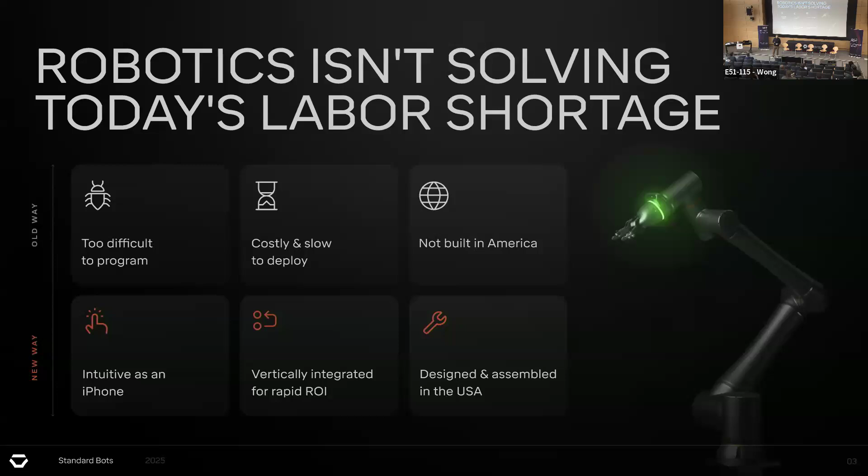So the problem we're solving is robotics today, most robots are just replaying motions. They're just running through the same movement again and again. And you almost have to be a software engineer to program the robots. So the interfaces are very confusing. You have to memorize a lot of things, and they're not capable of automating many of the tasks out there. Even for the most common tasks to automate with robots, the deployment rates are closer to 10%.

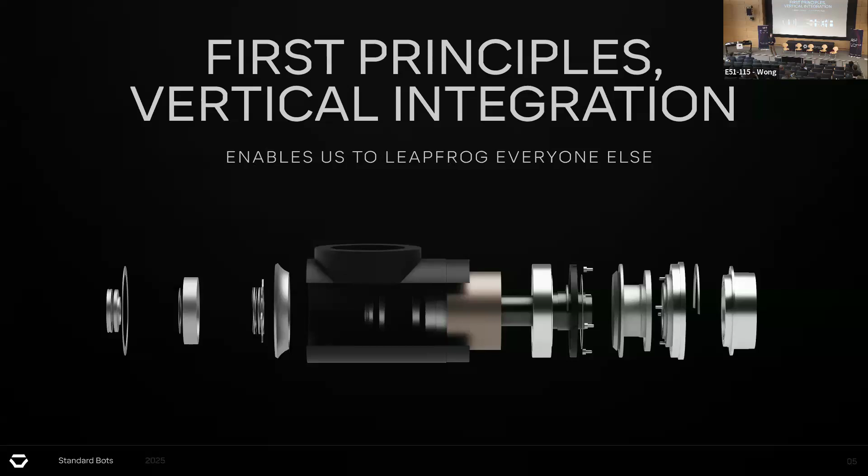But the real question and the focus of our company is on being able to automate a lot more. And the question we ask ourselves a lot is, why can robots do so little today? And the answer to that is really because there's so much variability in the tasks that customers want to do. And that can be the color and the shape and the type of objects, or it could be the environment and the lighting changing, or it could be they make one thing one week and something else the next week, and the program has to slightly change.

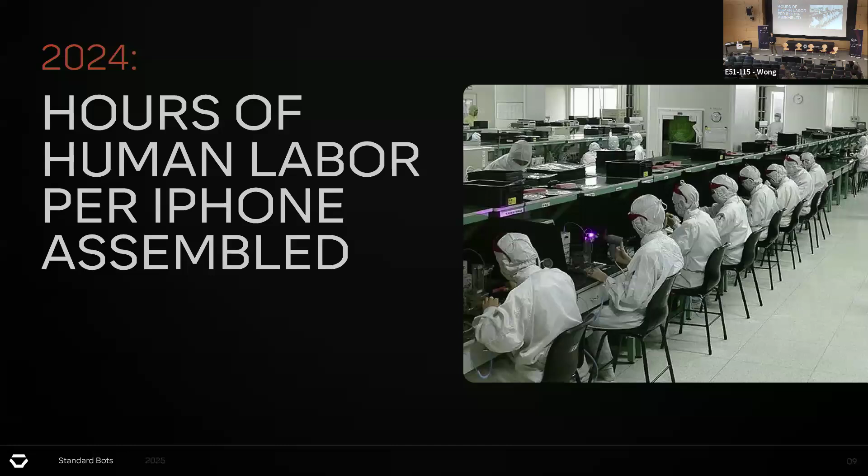And so the big change that's happening right now in robotics is this move to end-to-end AI models. And we've seen it in self-driving. So all the major self-driving companies are moving from just using AI for perception to find, say, the lane markers and the stop signs and those kind of things, and having rules-based or procedurally written code for actually driving, to a world in which the model is actually outputting trajectories, one or more trajectories, and they're choosing one of those trajectories and executing it on the vehicle. The problem with the procedural way is you write rules for one intersection, and then they kind of conflict at the next, and it becomes very hard to write a self-driving program that way.

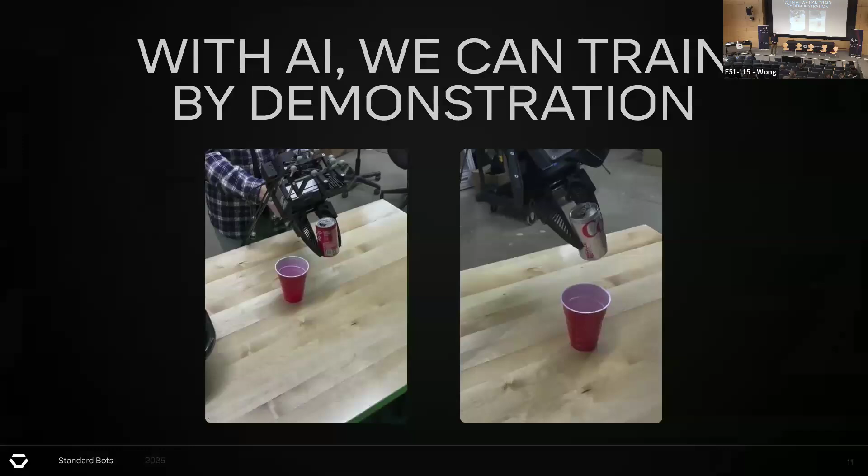Robotics over the last 10 years has been a lot of the same. There have been some models for detecting objects, but just detecting an object isn't enough to get a job done in many cases. And so we're seeing the shift to end-to-end models where the model is taking as input the camera data, the tool position, the gripper state, and it's actually outputting a trajectory for the tooltip for how to get that job done. These are some examples of this. I'll talk about a few ways that we collect training data, but this is a handheld device that we've made to collect training data, and on the right, it's operating autonomously.

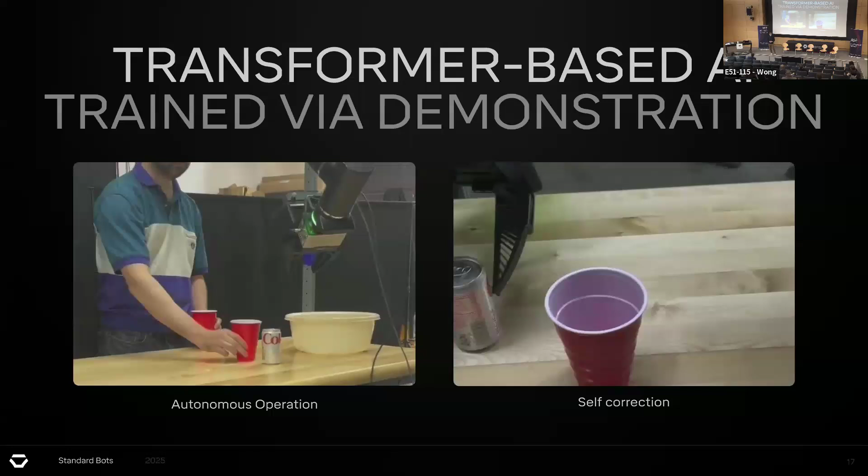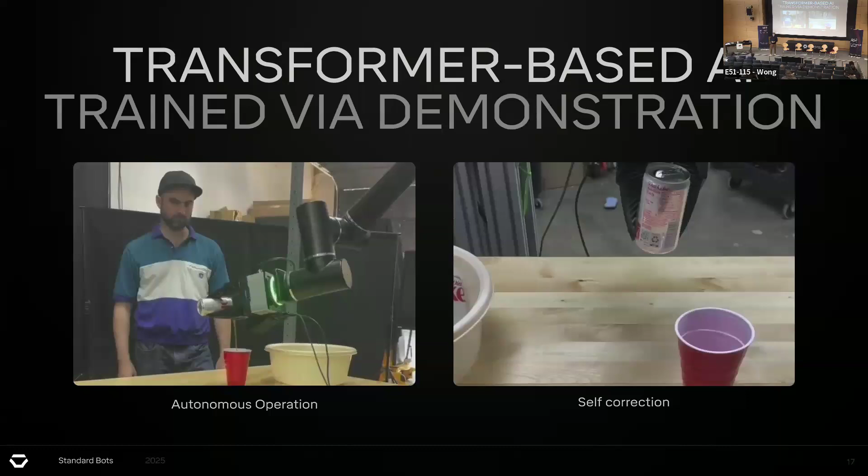The really cool thing about this approach is because it's looking and creating the trajectory in real time, it can react. So on the right, the user actually moves the can, and the robot can immediately react to that movement. It almost feels like it can think sometimes as we're training some of these models, where when something goes wrong, something slips out of the gripper, it can respond instantly. On the left, you can see it's robust to the location of the can, the type of the can, the location of the cup it's pouring into.

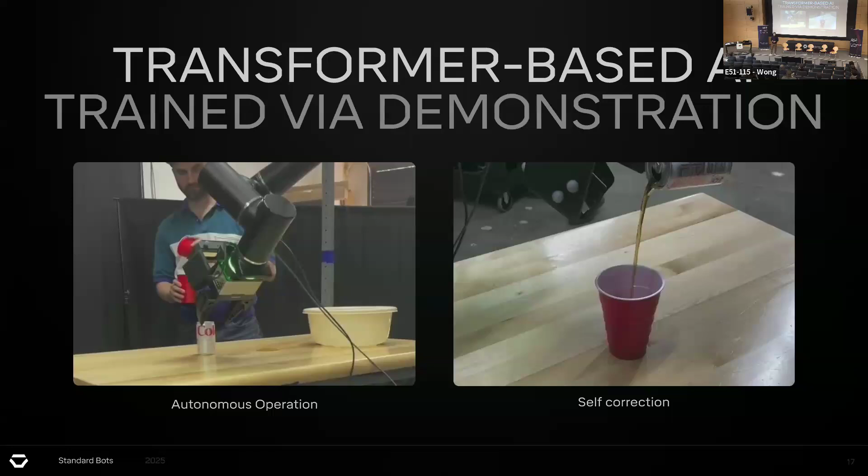It can align the spout so that it pours on the right side of the cup. And you don't have to write any lines of code for any of this. You just demonstrate the task, and it learns how to do that through the demonstration. So really, really cool stuff. Here's a couple other examples. Battery insertion on the left.

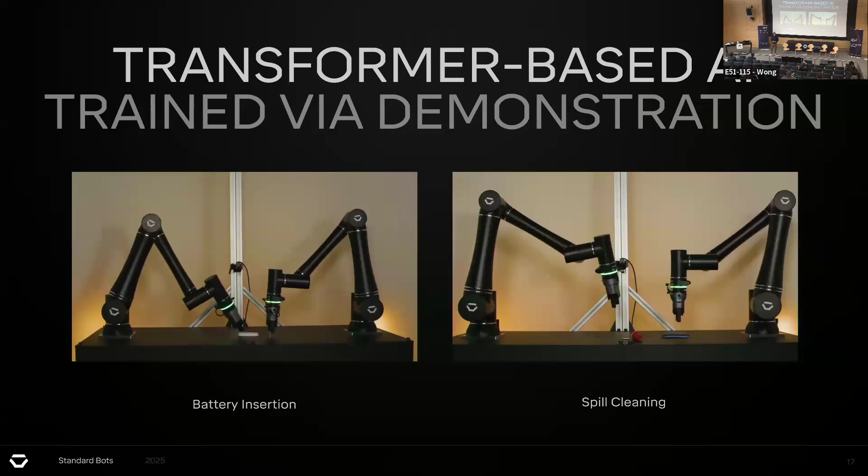We're finding that bimanual setup is really helpful because one robot can hold the item or help to reposition it, while the robot on the right is interacting with the world, like on the left video for the battery insertion.

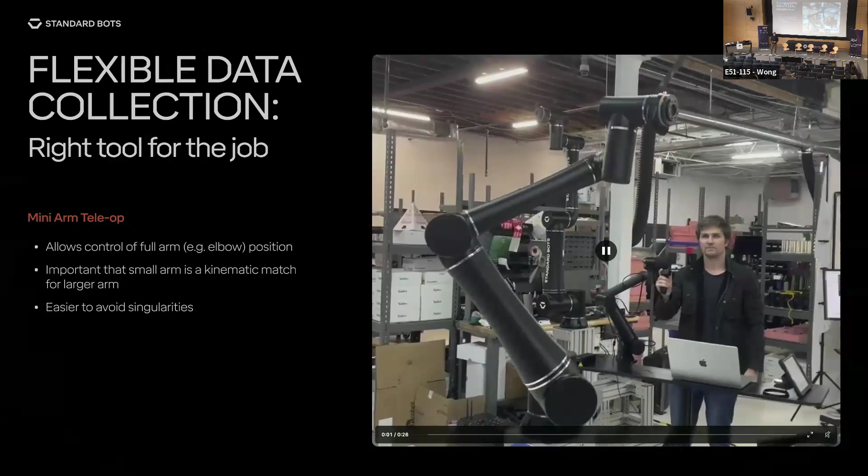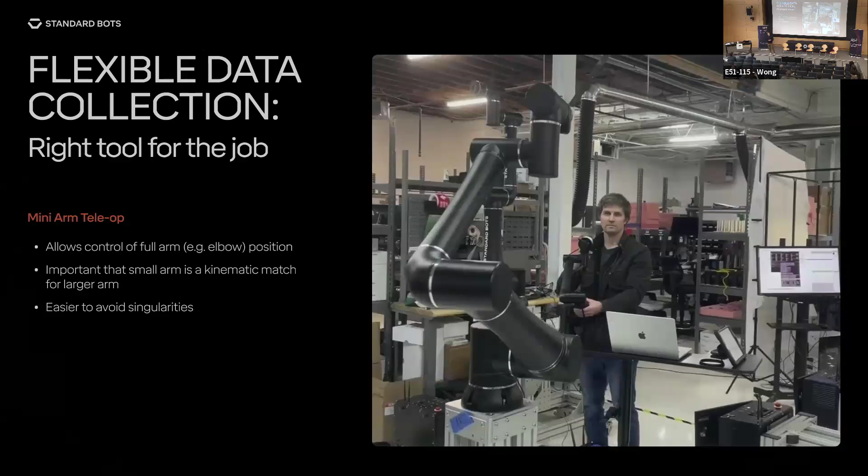Here's a couple ways to collect training data. This is using mini arms. So the mini arm is often a kinematically scaled down version of the bigger arm. This is really great if you want to control all the joint positions, so you can avoid singularities really well this way, because you have full control over the whole arm and where it's moving.

Actually, the robots were in a movie with Nicole Kidman called Babygirl. This was in that movie, which was kind of cool.

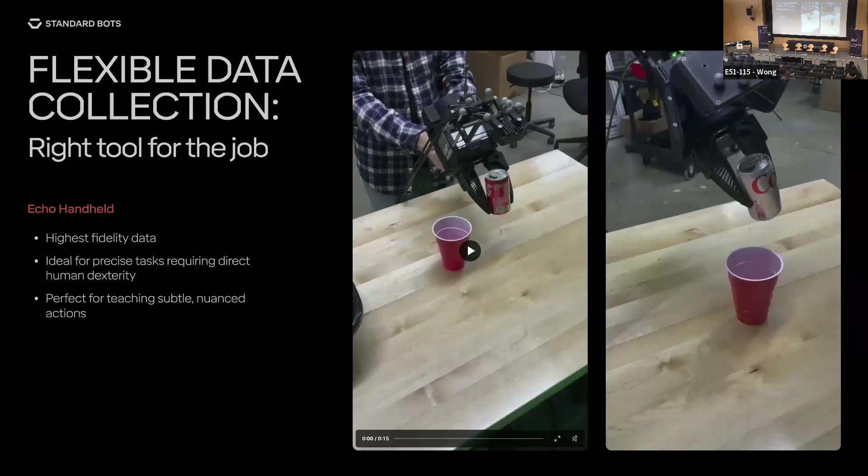Another way to collect training data we've tried is with a handheld device. So we built this device, and it has force sensing on it. It has an interface that can support lots of different types of end effectors. So you can plug in the end effector, control it with a trigger. It's all electronic and records all the training data you need. We find this is good if the end effectors are light. If you start to get a heavier end effector, then it becomes kind of onerous.

A joke you can tell about our data collectors is that their right arm's really big, because they're carrying these huge grippers all day.

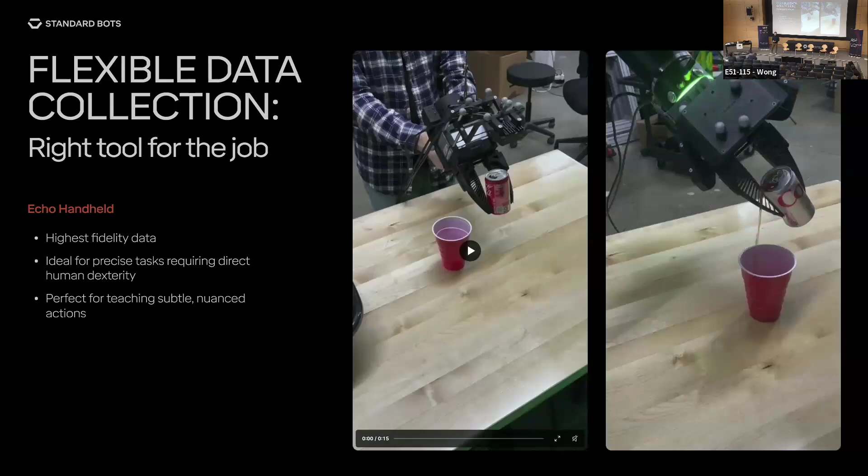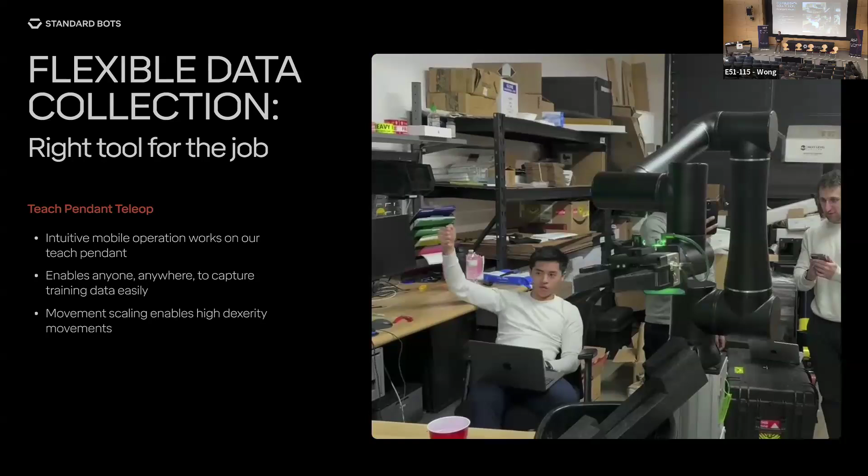This is another way that we like for collecting training data, where our tablet localizes itself and the tooltip moves in sync with the tablet. So this is a really simple way to collect training data because you can do it at the customer site. You don't need a lot of equipment or external tracking.

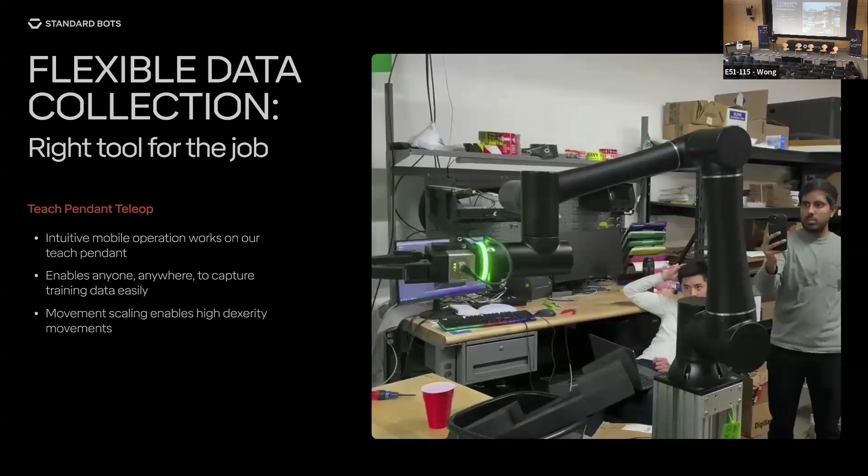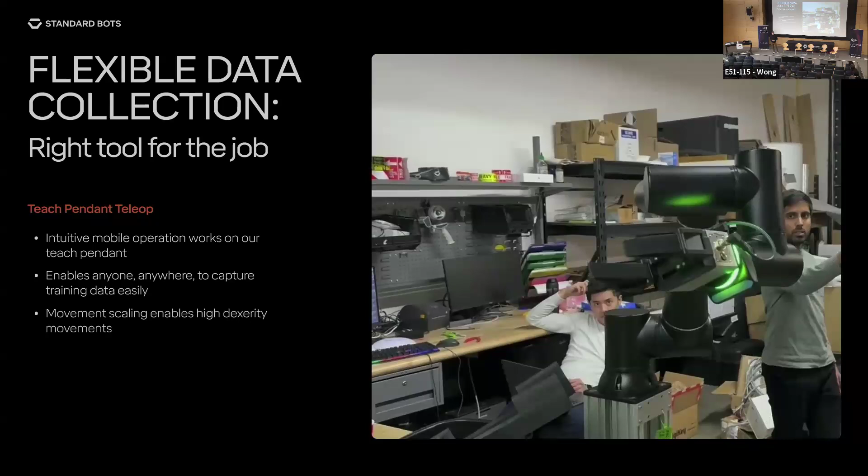We find that with movement scaling with this approach, you can train really dexterous tasks. So similar to the Da Vinci robot, obviously. With the Da Vinci robot, the surgeon moves an inch, and the robot actually moves a fraction of that. So with movement scaling, you can switch to a fine-tune mode and demonstrate more dexterous things. And then finally, we're pretty excited about collecting data through a VR, AR type approach. So those are different ways to collect demonstrations.

Where we are today in robotics is really just about short horizon overfitting. So we haven't seen any kind of foundation model be able to generalize between robots or between tasks super well. We do find that foundation models with lots of examples help as a starting point, but you're really training a task-specific model and overfitting the model to that task.

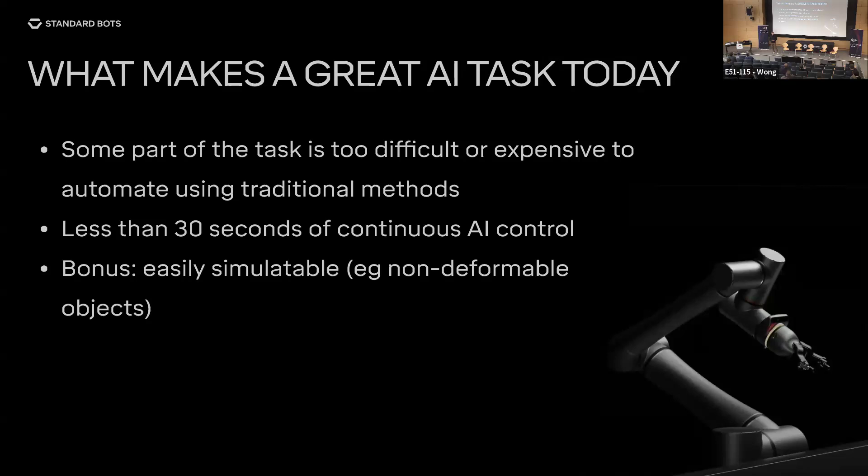The biggest advantage of this approach is you can now automate tasks that weren't possible to automate before, right? And that's a lot of the work that we have out there, like assembling iPhones. So that's a really big deal for customers. We also think that customers will see a better ROI because it's just easier to program a task when you just have to demonstrate it and there's no code to write and you don't need experts to be in the loop on that. And being able to correct mistakes in real time is a big deal as well.

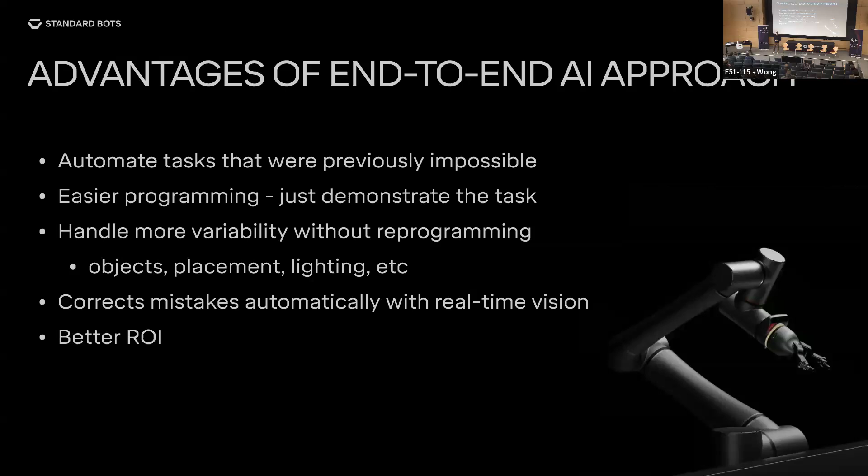These are some of the robot features that are needed for this kind of approach. So you really want to have a good low latency, high speed interface for real-time position and gripper control. Not every robot has that, not every gripper has that, but the model is streaming commands out for the robot and the gripper, so that's important.

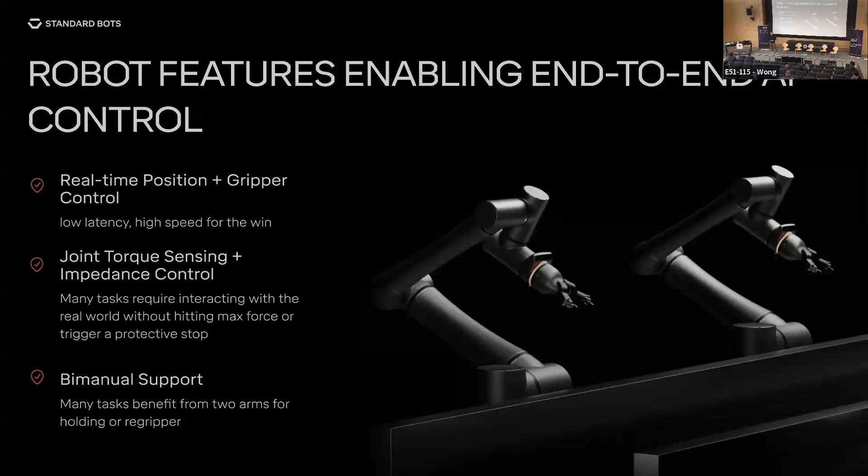You really want to have good impedance control on the arms so that you can interact with the world without moving to either the max force the arm can apply or triggering a protective stop. A lot of the arms out there have really tight parameters around their collision detection, so if you hit something, they trigger a stop. And then having bimanual support is another thing that's pretty useful for this type of control.

This is what one of our programs looks like. We've made it so it just reads like a story, and each step encapsulates all the logic that happens inside that step. And for us, AI is a step in this program. It's a skill in the story that we're otherwise running. So we're using classical methods to do everything that you can use classical methods for, and AI only for the parts that require it.

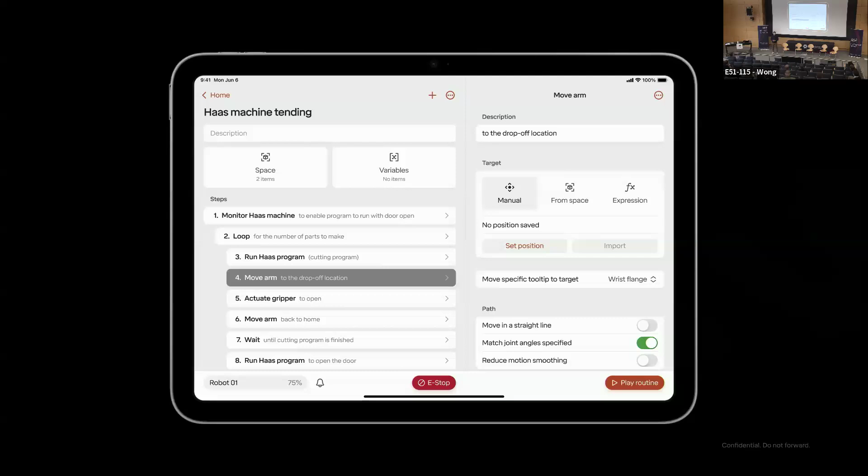In terms of simulation, we think it's really great for these reasons, but not every task requires it, and obviously we find that lots of real-world customer tasks are hard to simulate.

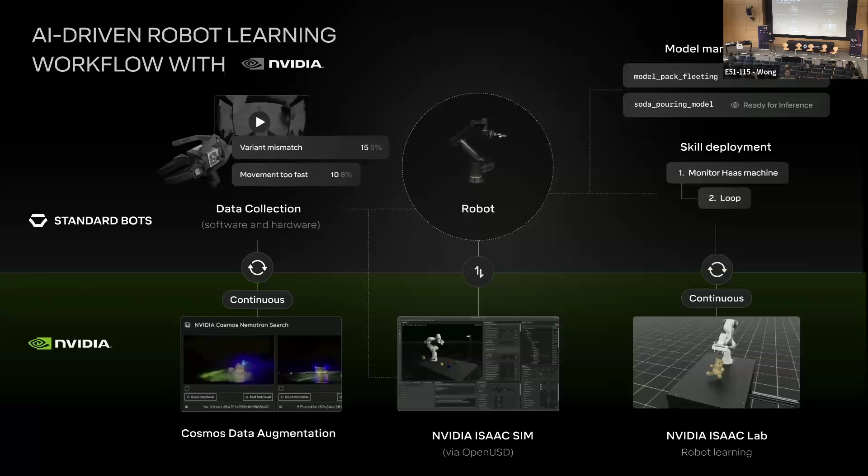And this is our vision, is to be the platform for applied AI in robotics. If you try to deploy these models today, there's a lot of reinventing of the wheel. It's a lot of work to create your own pipeline to collect the training data and upload it to the cloud, train the models, organize your data, deploy the model. So we're trying to make that really simple and easy.

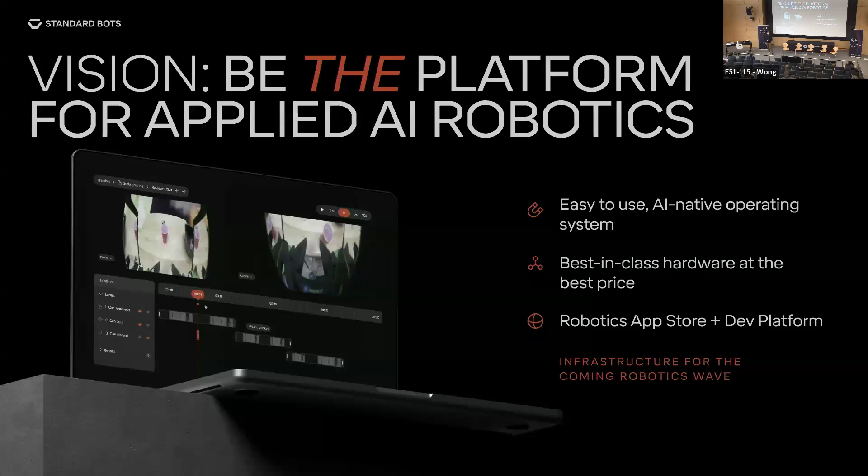And then these are just some shots of collecting training data. You want to be able to annotate, often with human readable text, different segments of your task, and then manage and deploy your models.

So just wrapping up, almost no robots today are running these types of end-to-end AI models. It's really just the beginning of this shift. And we think it's going to go from almost zero to this is the mainstream way that all robots are programmed over the coming years. We think our ROIs will be higher. We think that every single quarter, more and more tasks will be possible.

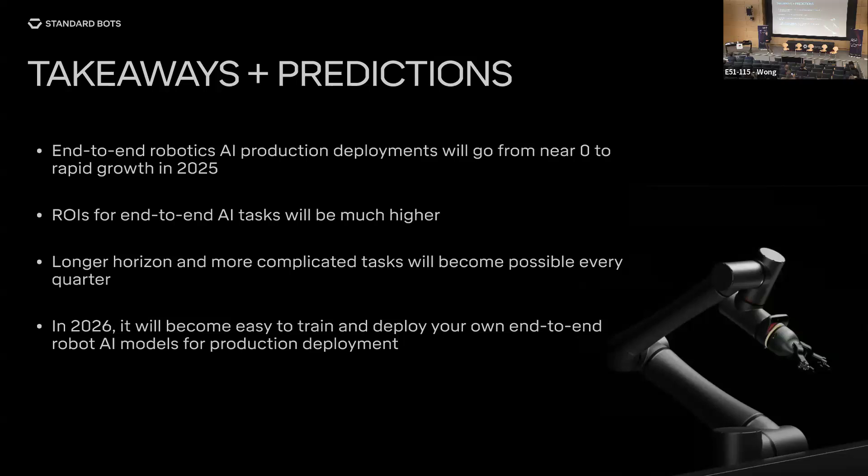So all the advancements in LLMs, like GRPO from DeepSeek, that's all directly applicable to robotics, just like it is to LLMs. And we think next year we'll start to see tools where it's really simple for production situations to train these models and deploy them.